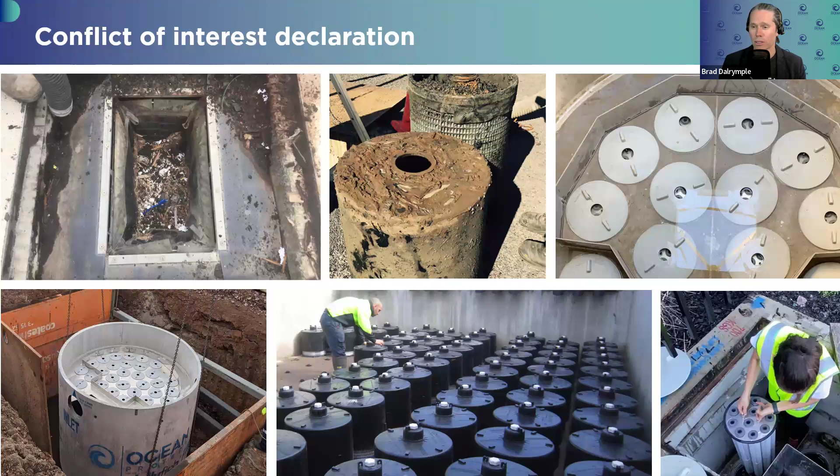But look, first up, before we dive into the content around proprietary stormwater treatment assets, full disclosure, we've got obviously a significant conflict of interest here. Ocean Protect, both Peter and I work for, we sell proprietary stormwater treatment assets, a whole range. And look, we're trying to mitigate those conflicts of interest as best we can. We'll try and provide full references to everything we say today. But obviously, happy to take questions from the field as well.

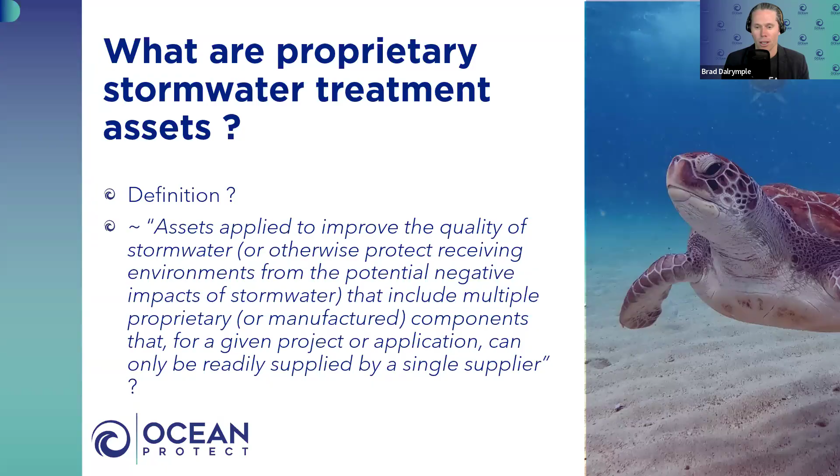Starting with the Ocean Guard, which is our gully pit insert gross pollutant trap. Basically it's mounted into the pit type system, sits below the grate. There's diverters, flow diverters at the top of the system that send the flow into the basket.

We typically have a 200 micron media bag inside the Ocean Guards. There's high flow bypass slots at the top as well for when the flow rate exceeds 20 liters a second, which is the treatment flow rate per Ocean Guard.

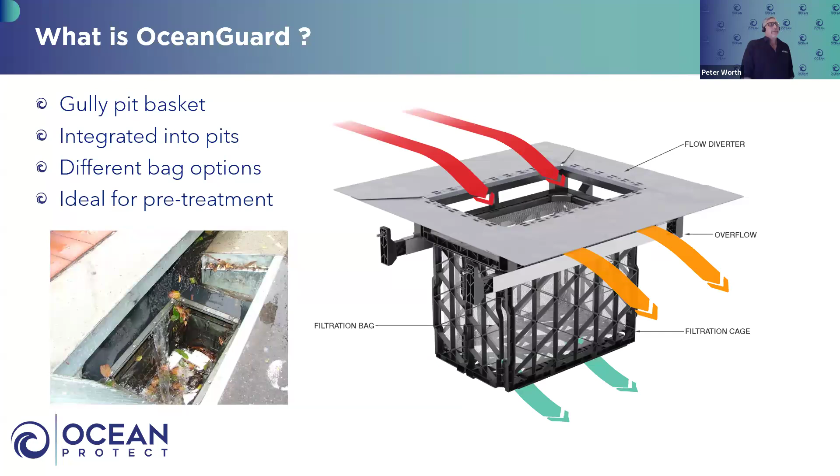We have different bags and different depths and different sizes that we can use to fit generally most standard size precast concrete or plastic pits that you have on your projects. The picture on screen is showing some Ocean Guards installed, capturing a lot of gross pollutants and some pretty manky stuff.

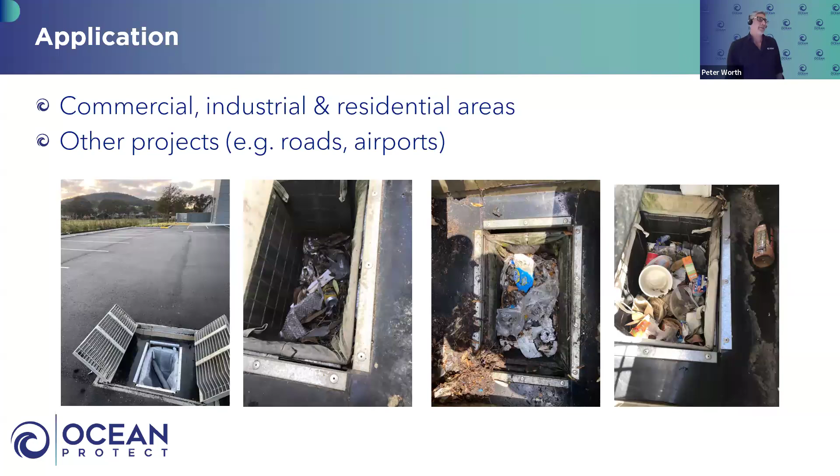So they do a great job of pre-treating before our other treatment assets that we're going to talk about as the slides go on. As I mentioned, they fit in generally pretty standard size pits from 450 by 450 up to 1200 by 1200. As you can see on screen, you can sit them below the grate.

You can have a piped inlet as well. Just keep in mind, if you are doing a piped inlet above an Ocean Guard in a pit, you don't want to set the Ocean Guard too deep.

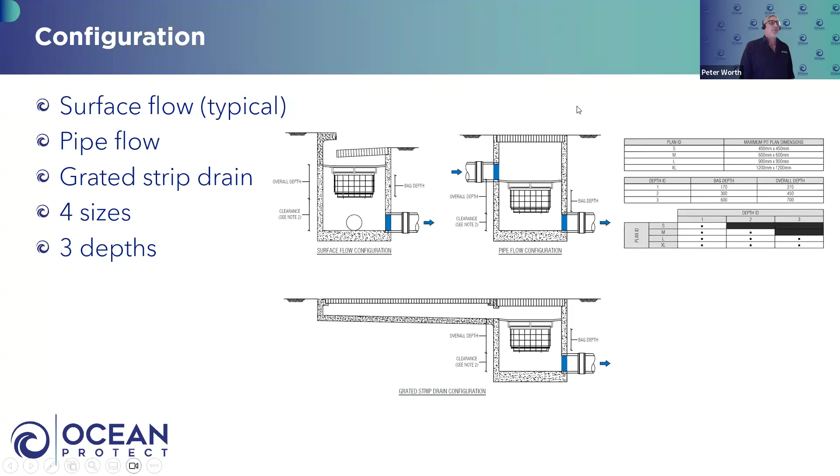The Ocean Guards have plenty of real world published studies and data on them, two peer-reviewed reports, and it's also SQIDEP verified, the Ocean Guard pit basket.

Maintenance is fairly simple. You need to lift the grate and remove the bag. There's a ring around the top of the bag, so you can remove it and empty out the contents, give it a quick backwash, and put it back in. We do have replacement bags available too if they're damaged. So just let us know if you've got a site with some damaged bags, we can always replace those. It's a fairly cost-effective way of fixing them up if there are issues with the bags.

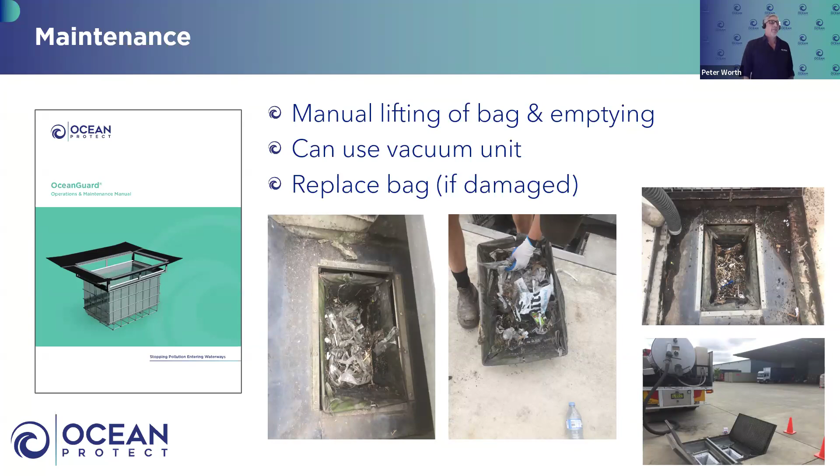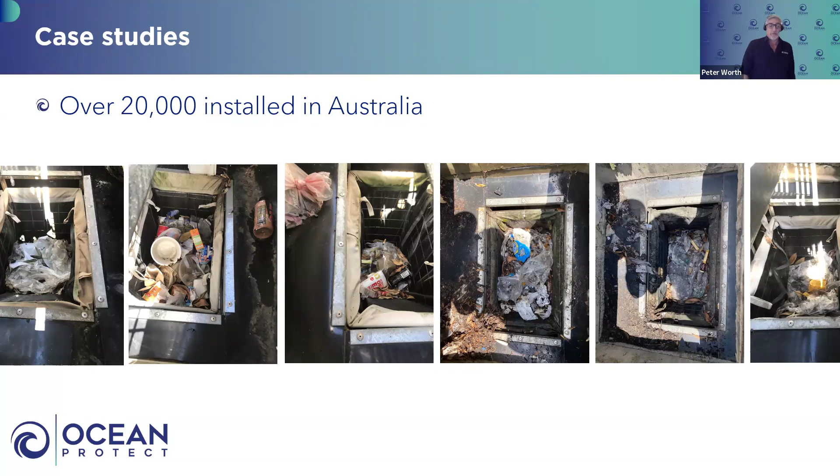We've installed over 20,000 throughout Australia to date, and we see them in a lot of jobs. We always pretty much use them for pre-treatment in front of our tertiary filtration devices, which I think we're going to talk about next.

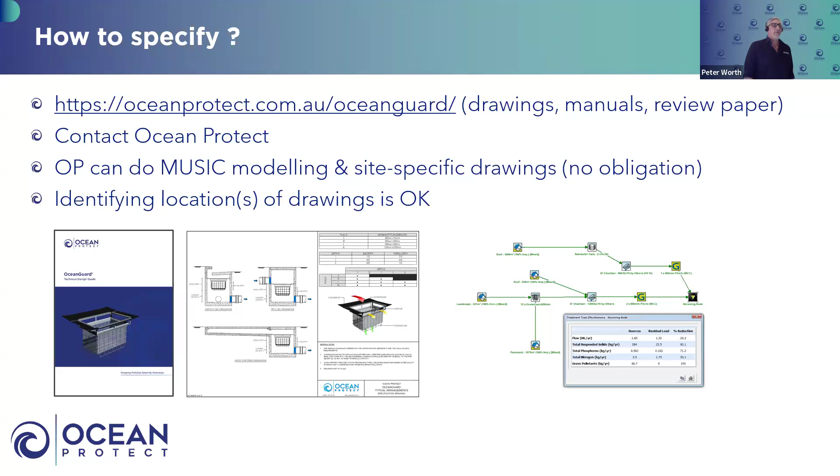We can dive straight into the storm filter now, Pete, if you like. Let's do it. The storm filter cartridge, we've sold in Australia for 25-plus years, numerous systems already installed, and looking at them every day.

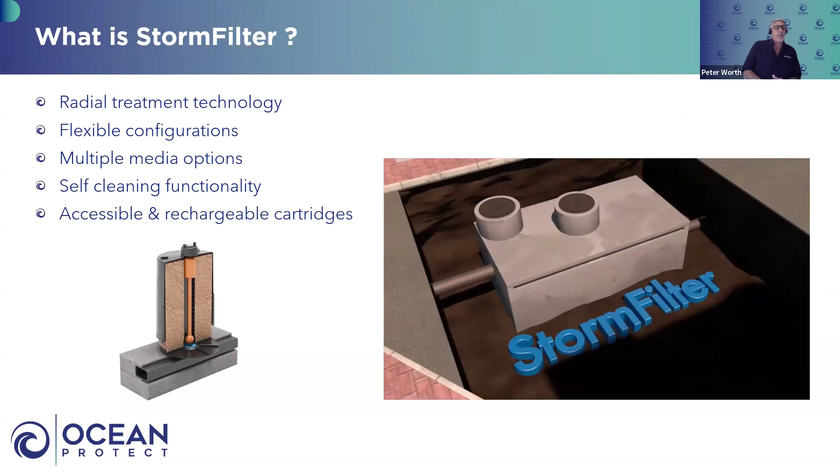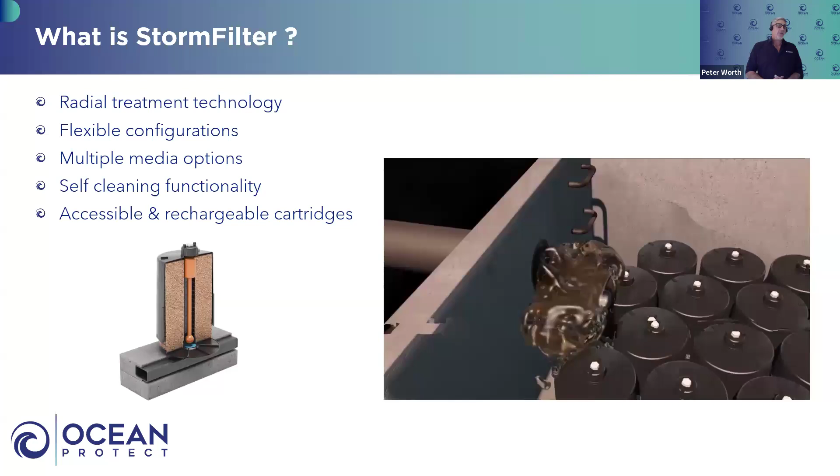It's a very flexible system, it's a media-filled cartridge. You can have multiple different configurations for the storm filter system. We can use them in a precast unit for treatment only, or if you do have a detention requirement on your site, we can also put them in a section of your larger detention tank, usually at the inlet, so we treat the first flushes and the early flows off your site.

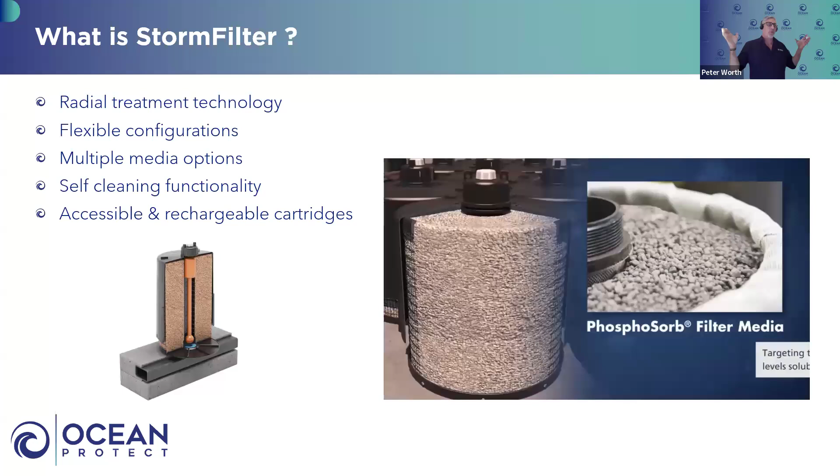Basically, it's a media-filled cartridge with a float inside, siphon actuated. As water builds up in the chamber, it lifts that float and draws the water radially around the full surface area of the storm filter cartridge, down through the center tube, and out through the underdrain pipework that we encase in a false floor within the chamber, as you can see in the video on screen.

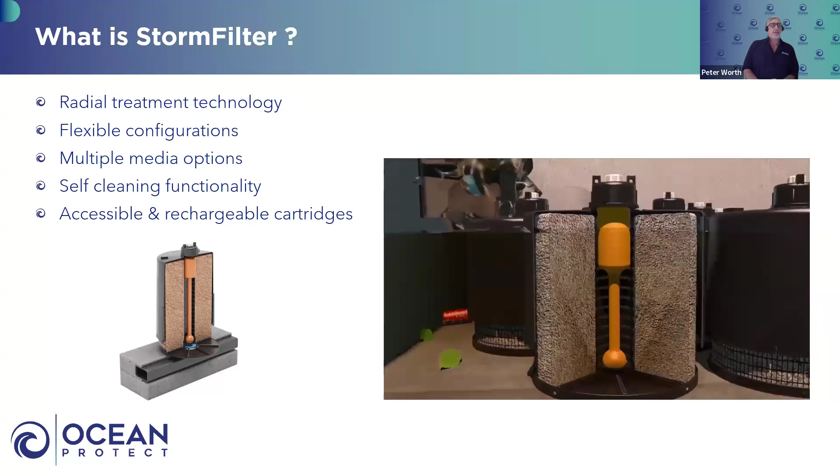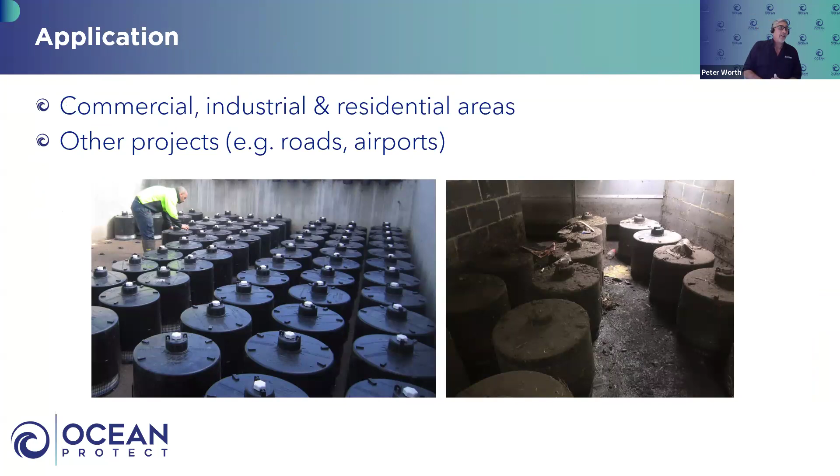Very efficient for removing your TSS, TP, and TN, and again, SQIDEP approved for the PhosphoSorb media. Commonly used in many commercial, industrial, and residential areas, and other projects like roads and airports. We've installed thousands of these throughout Australia to date.

We have 3 different hydraulic height cartridges available: the tall 690, the standard 460, and the short 310 cartridge. Just to note, however, the standard 460 and the short 310 cartridge are physically the same height. The float inside the cartridge is different, so it actuates that siphon and backwash and engages the treatment at a different head. So just keep that in mind if you are looking at a shallow tank.

Typically for the tall 690 cartridges, we'd request a minimum internal tank height of 1100 to 1200 mil. For the standard and the short cartridges, 800 mil is about as low as you want to go for those type of systems.

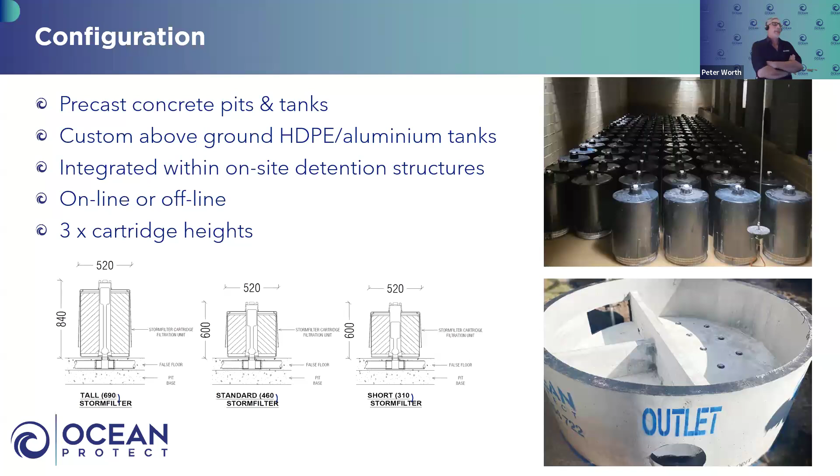As I mentioned before, the StormFilter PhosphoSorb media is SQIDEP verified and approved, so we can use that in any areas that you may need to fit that bill, or councils that have SQIDEP requirements. There's plenty of real world studies and peer reviews available. If you want the data, just let us know.

We do the maintenance of the storm filter systems a little bit like a swap and go with your gas bottles at the service station. So if we had a system with 10 storm filter cartridges, and we knew it was time to change those cartridges, typically anywhere between 1 to 3 years, we would come to site with refurbished cartridges with new media. We would take out the old cartridges, replace them with the new ones, and clean out the chamber at the same time. The other advantage to the storm filter cartridge, a bit different to some other products on the market, is that we can undo the cap at the top, lift the hood off, and remove the media via a suction hose, which allows you to pass the cartridges out empty. That can be a good thing to keep in mind if you've got shallow tanks and tricky sites.

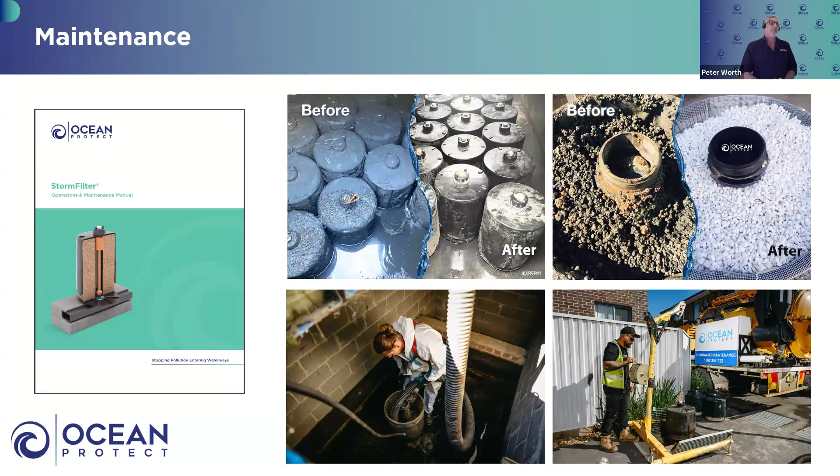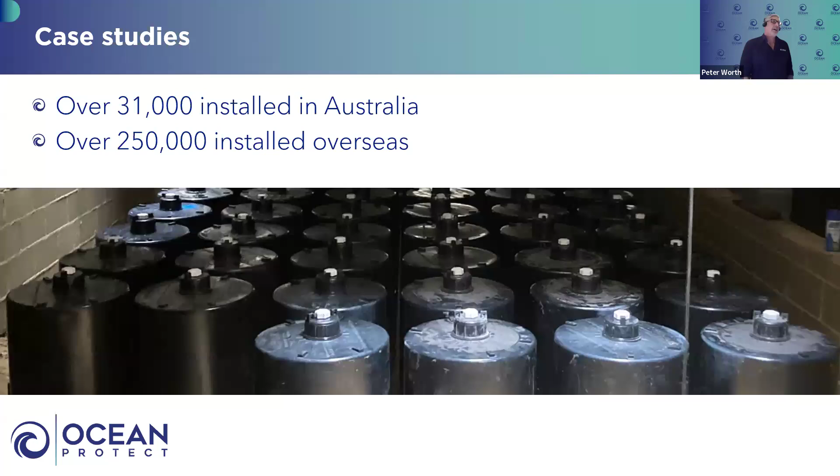To date, we've had over 31,000 installed throughout Australia, and over 250,000 installed overseas. In my opinion, it's the most used proprietary filtration product worldwide. Again, happy to look at your models and assist you in appropriately sizing your treatment trains, storm filters, and OceanGuard systems for your projects.

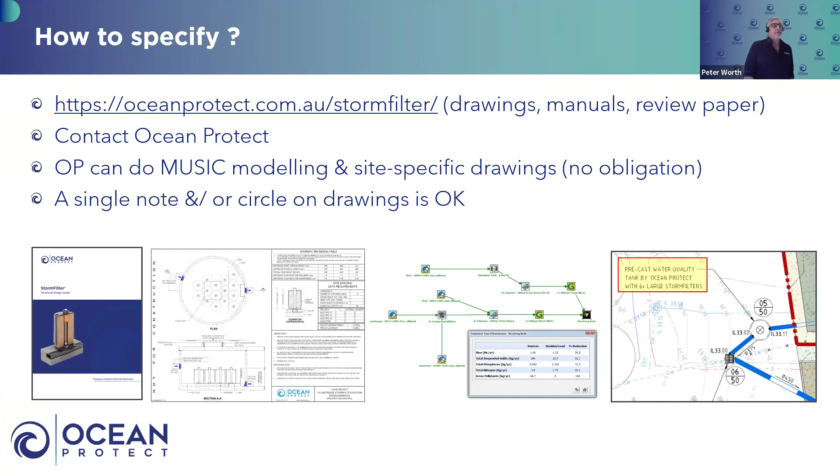Let's dive into the jellyfish, last but not least.

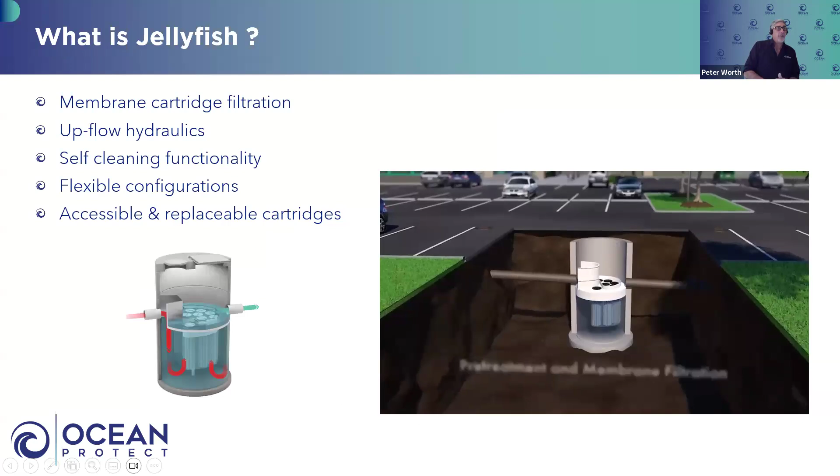The jellyfish is a little bit different to the storm filter cartridge, where we build water inside the chamber to actuate the siphons in the storm filter cartridges. It operates a little differently. You've got an inlet pipe, noting that all jellyfish systems need to be offline. Water comes in and hits the maintenance access wall. It's not a weir, that's for ongoing maintenance.

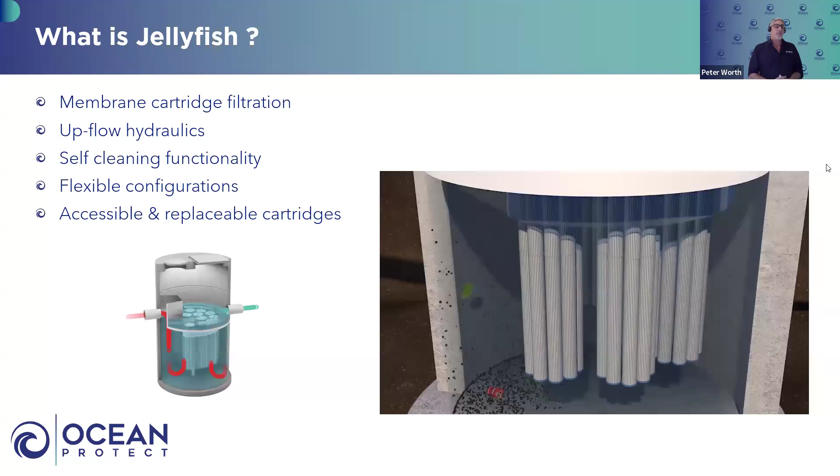It forces water down into the sump. Water then has to change direction and float up, which promotes sediment dropping to the ground, and goes from the outside through the tentacles and up through a hollow center tube inside each of those tentacles in the jellyfish cartridges. We also have a plastic separation skirt around the full depth of the jellyfish cartridges to help stop oily stuff, which you might get on car parks and similar sites, from adhering to the membrane of the jellyfish cartridges. Water then flows up through the top and out through the outlet pipe. Typically, you need 460 mil upstream driving head for a jellyfish system.

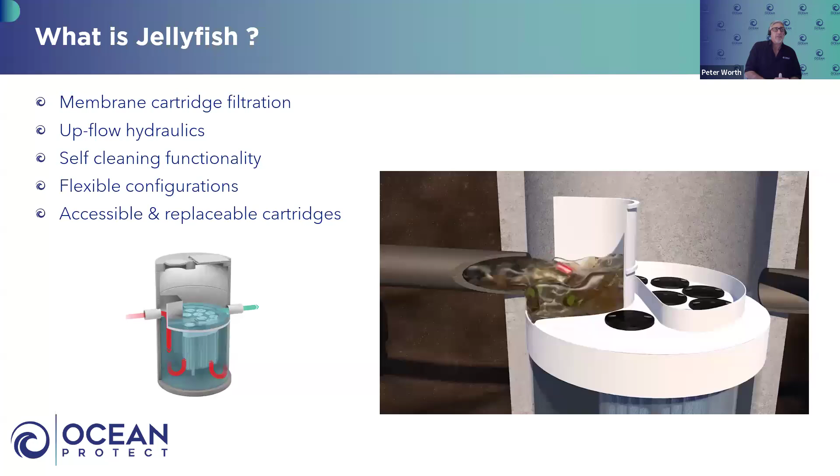Again, very suitable for commercial, industrial, and residential projects. It's very popular for sites that require a low driving head for one reason or another, or if you've got hydraulic issues. We've installed many jellyfish systems across Australia to date.

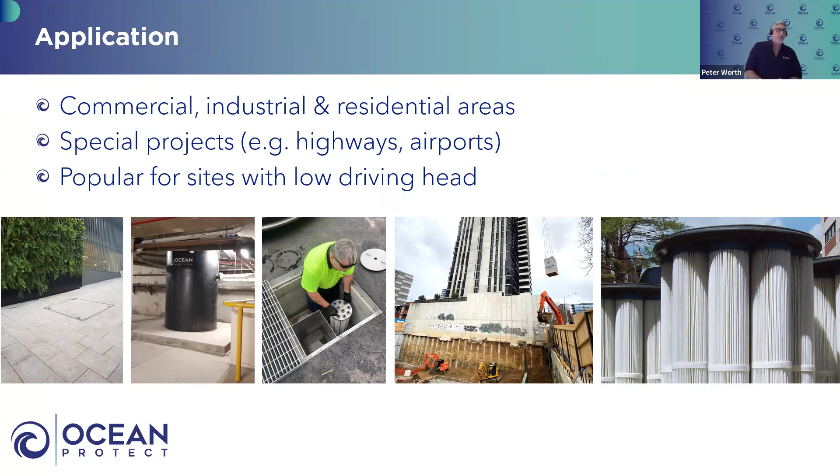Offline configuration, as I mentioned, can be done a couple of ways. You can have a weir and an upstream pit that sends the low flows to the jellyfish system off your main trunk line. If you don't want to use a weir, you can lift the bypass pipe to create a hydraulic weir. Again, the typical driving head for a jellyfish system is 460 mils, meaning the high flow bypass pipe would be 460 mil higher than the outlet of that offline jellyfish system. Typically, there's 150 mil between your inlet and outlet pipes of the offline jellyfish.

Two real-world published studies, two peer review reports, and again SQIDEP verified and approved by Stormwater Australia, so able to be used in any sites you might need to, or LGAs that require that SQIDEP approval.

We talk about SQIDEP approval, but it's probably worth noting that it's only required in a few councils in southeast Queensland currently, and I think Western Sydney. Outside of those areas, including those areas, OceanGuard, Stormfilter and Jellyfish are pretty much approved in the vast majority of councils, at least for private sites. But if you're ever in doubt, obviously you can just contact us and let us know.

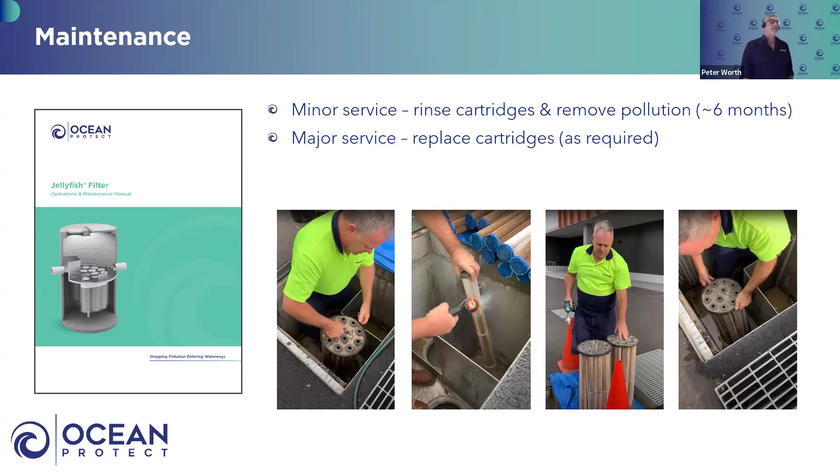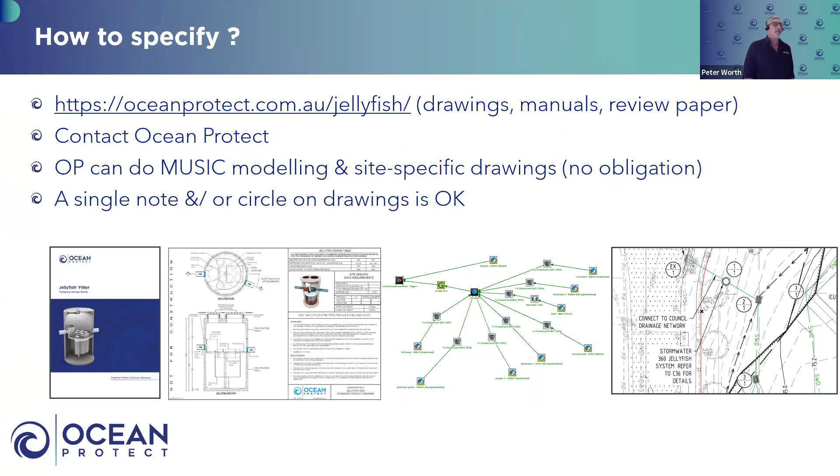Ocean Protect offers maintenance of all our systems. Over 1,600 jellyfish systems installed throughout Australia since 2017. Again, happy to assist engineers or councils or whoever in appropriately sizing our jellyfish systems, and all our systems for that matter. That's jellyfish.

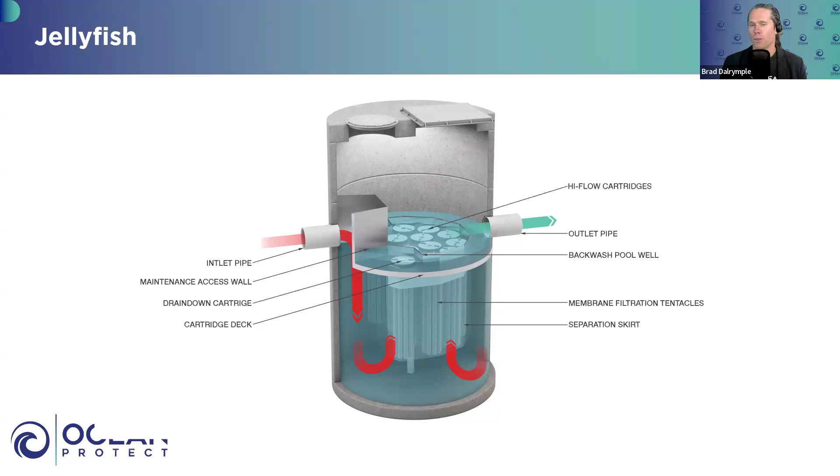Thank you, Peter. If you've got any specific questions about those specific assets, feel free to put them in the Q&A. But I'm going to dive into something a little bit more controversial, and talk about some of the common claims I've seen in our industry for several years around proprietary assets. These are generally the main ones I see. It's obviously relevant for Ocean Protect assets, but it might be relevant for other manufacturers as well. To avoid any dramas with other companies, I'm going to predominantly focus on Ocean Protect assets as the example when talking about these claims.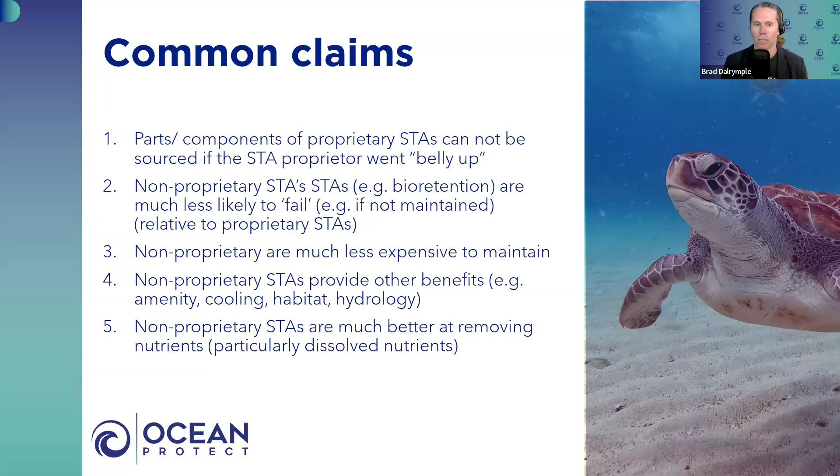Claim number one is that if Ocean Protect went belly up, we won't be able to get any of the parts or components, so the assets themselves would be useless. So Stormfilter, for example, yeah, the media's used up, absorbed all the pollution, Ocean Protect for some reason went belly up, can't get replacement media, so the Stormfilter cartridge is useless. Is that right? Yeah, I've heard this commonly.

Look, I think a couple of points on this. Number one, Ocean Protect is at extremely low risk of going belly up or bankrupt or otherwise into liquidation, or closing up shop. We've been operating for over 21 years in Australia now, and, without sharing our bank details, we're in a very financially sound position. So extremely low risk of going belly up.

But for whatever reason, if we did, Contech, which is our partner company in the US, is a very financially sound company. I think they've got over 1,600 employees or thereabouts, and have been operating for longer than Ocean Protect. So if Ocean Protect weren't around, anyone could easily get the components or parts from Contech directly. But having said that, if Ocean Protect wasn't around, I'm sure, given the nature of our business, someone would probably take our spot quite quickly, recognizing that it's a financially sound company, and it's doing a great job protecting the environment and making a dollar at the same time.

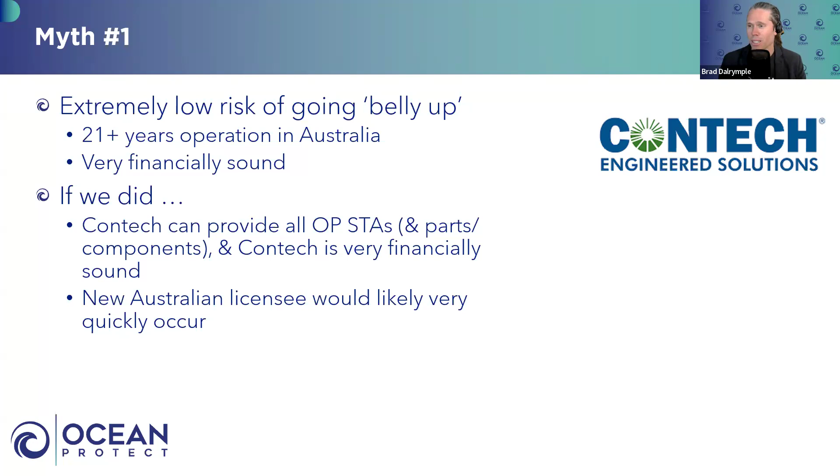So it's a pretty cool business, I think. I think if Ocean Protect went under, someone would take our spot, albeit not as cool, but they'd probably give it a crack. Am I wrong, Peter? No, you're right. So look, this claim is totally busted. I just don't see this as accurate in any way, shape, or form.

Number two: the claim that non-proprietary assets like bioretention or wetlands are much less likely to fail, i.e. not going to work, if they're not maintained, relative to proprietary assets. So the general comment I get is, oh, I can leave bioretention alone for years, decades, and it'll still work, no worries at all. Whereas Ocean Protect assets or others, yeah, if I don't maintain them, they won't work.

Okay, look, let's have a look at the data around this. I'm going to show a couple of studies. First up, this is a study, full disclosure, I was co-author on this study, but we basically collected condition assessment data for bioretention systems. One set of data from Moreton Bay Regional Council, I think by memory there's about 318 bioretention systems, and another council in Southeast Queensland, which I can't name, who owned a whole bunch of bioretention systems.

And long story short, about 20% were in a poor or very poor condition, which basically means they need to be rectified, i.e. major rectification works like replacing the system. And recognizing I'm quoting myself and my co-authors there, straight out of the paper published at the Ozwater Conference: a lack of maintenance activities is predicted to be the key reason for the poor or very poor condition assessment ratings.

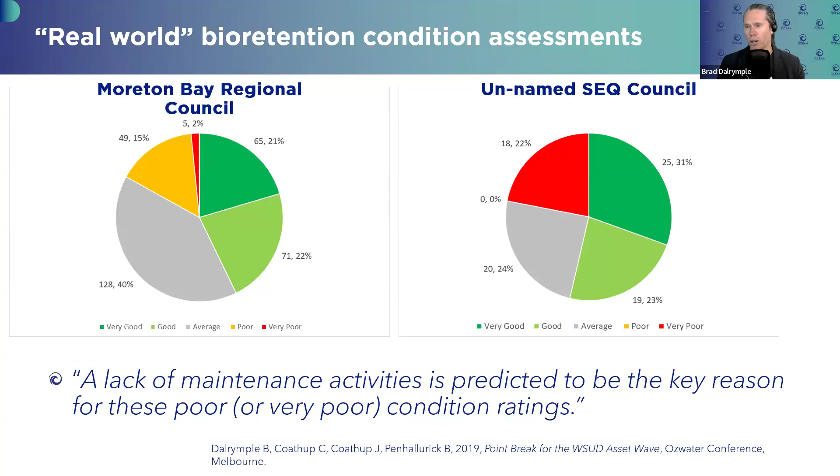So that's just bioretention, recognizing it's just one study. Another study, if I can refer to, is by Andrew Thomas, who's now president of Stormwater New South Wales. And I think I can see Murray Powell's name there—he's vice president of Stormwater New South Wales—and Tim Fletcher and a couple others.

They looked at condition assessment ratings for a bunch of assets, bioretention systems, wetlands, etc., and obviously found a very significant proportion were in poor condition. Quoting this paper: maintenance practices, or the lack thereof, is the leading reason for the high proportion of assets being in poor condition. They say appropriate levels of maintenance may be the single most important issue currently facing their effective performance. So this idea that you can leave non-proprietary assets without any maintenance—I just don't think the data is there to support it.

I was talking to a consultant yesterday, I won't mention their name, who thought the failure rates were probably closer to about 80% for bioretention systems. But whether it's 80 or 20 or somewhere in between, fundamentally these assets—bioretention, wetlands, etc.—need to be maintained, just like all assets, including proprietary ones.

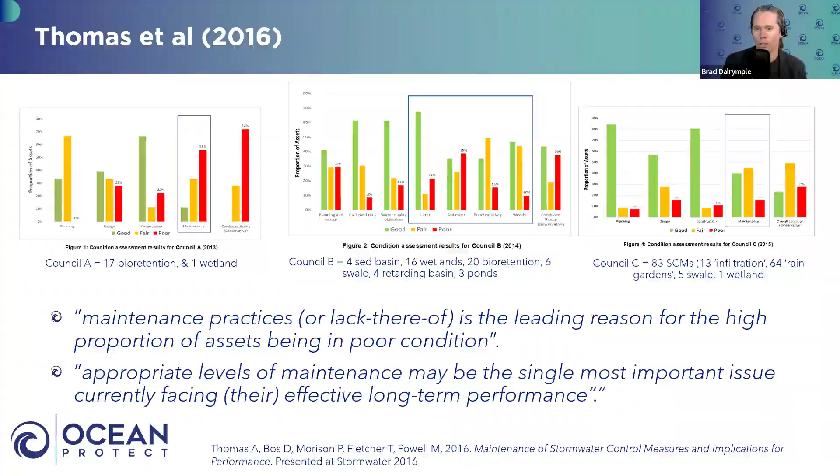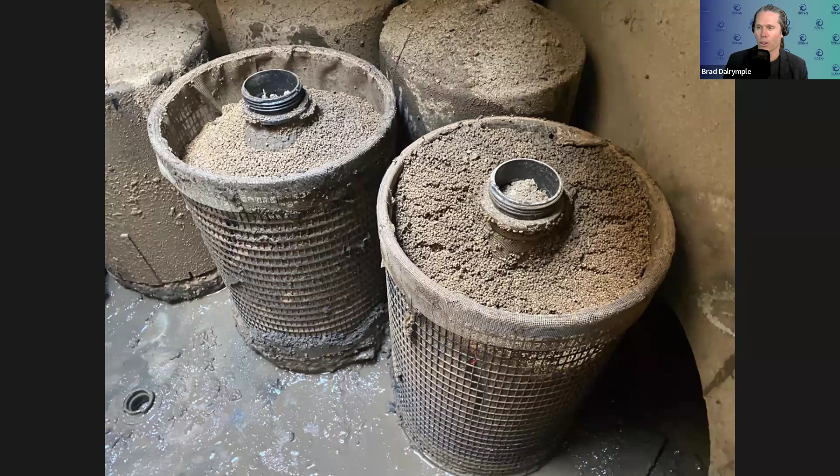We know that this media needs to be replaced after a certain period of time, and that's actually reasonably easily done, as Peter referred to. We see what our assets do, and this sort of pollution will also accumulate in other filters, whether it's a vegetated system or a wetland or whatever. I'd really question the ability of a bioretention system to just sit there receiving stormwater flow, intercepting this pollution, without needing this material to be routinely, albeit infrequently, cleaned out. It's not going to go anywhere, that's for sure.

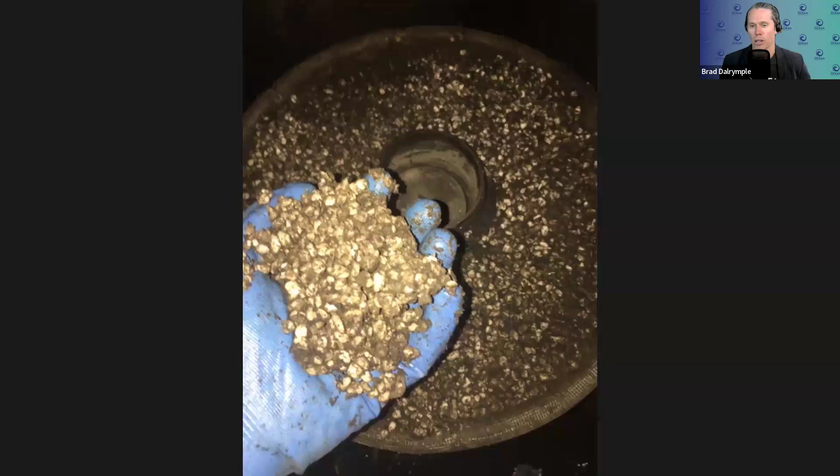Give you an example—this is a storm filter at a shopping centre car park in Adelaide. Pretty disgusting. Again, if bioretention is a filter, it needs to be maintained essentially.

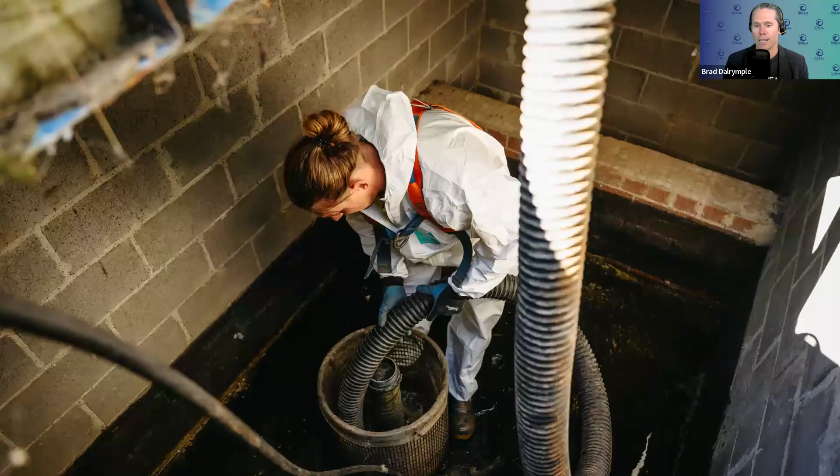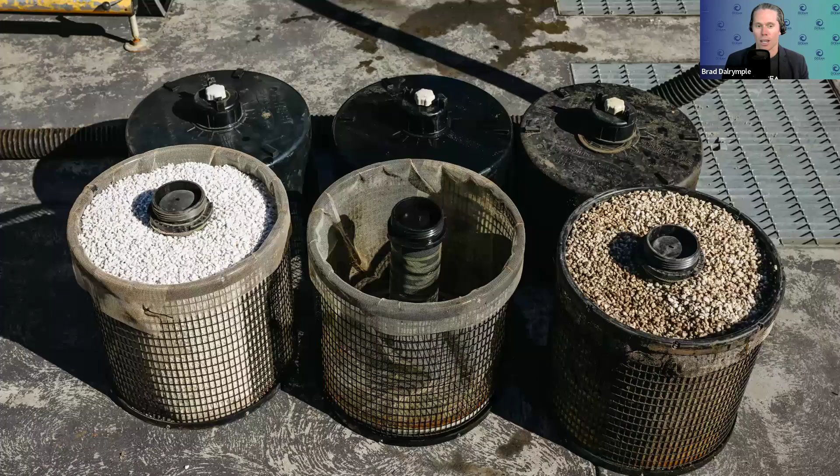This is just our crew doing some maintenance—replacing and sucking out the filter media—and as Peter referred to before, we can just replace old filters with new filters quite easily. That's another photo of new filters on the left, old filters on the right, very easily replaced.

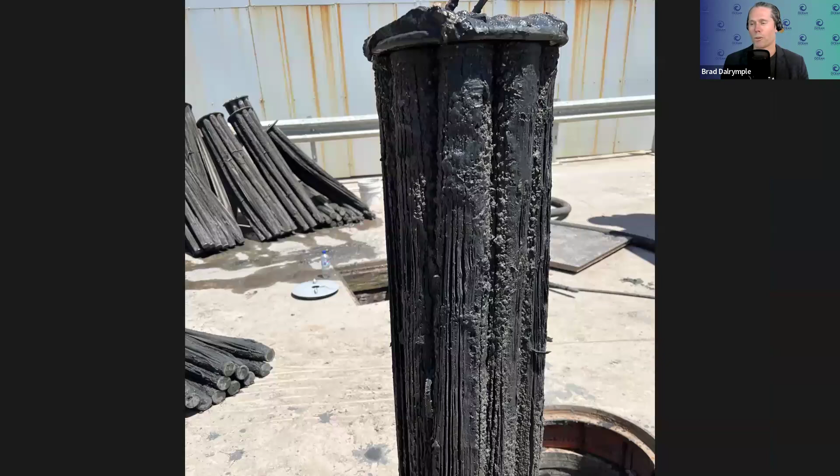This is Jellyfish, Peter referred to before. These are new cartridges, but you can see these are old cartridges that have been in the ground for a few years—you can kind of see what they collect. Again, all stormwater treatment assets need to be maintained. I don't think it's appropriate to say non-proprietary assets don't need maintenance, or even that they need less maintenance than a proprietary asset.

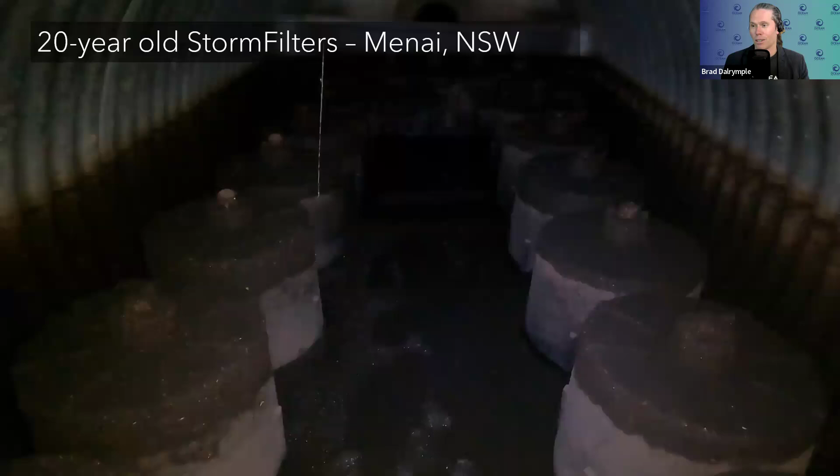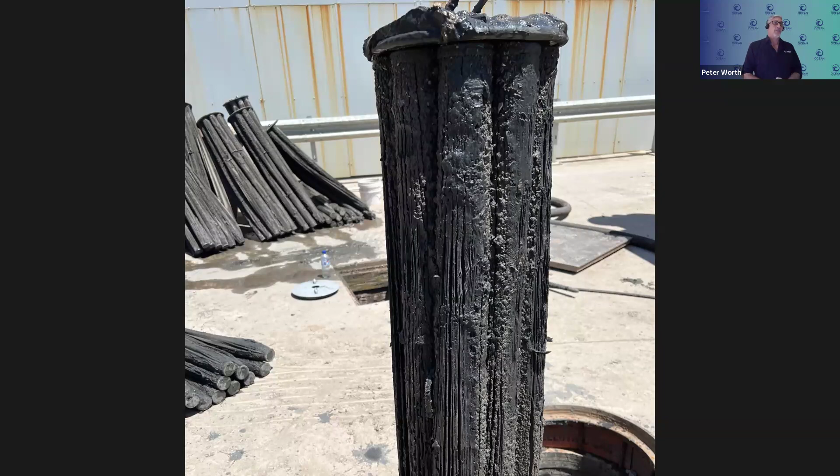One thing to mention too, Brad, sorry to interrupt—it's always paramount that we don't have our proprietary systems, I'll just speak about those, online before construction is finished on site. These systems are designed via MUSIC models and stormwater management plans for the end use of the project, so we don't want them used as construction-load-type treatment systems.

Cool, thanks Peter. I'm not sure if you guys can see this, it doesn't appear very well—it's hard to take photos underground, but this is a storm filter, sorry, this chamber with a whole bunch of storm filter cartridges underground. Our esteemed director Michael Wicks checked this out 20 years after they were installed, and we don't believe they've ever been maintained. Fundamentally, it's really easy to get this back up to speed.

So it had a whole bunch of accumulated pollution—the cartridges had probably hit their limit in terms of accumulation of pollution—but yeah, pretty easy to fix up. Just suck out the sludge at the bottom and replace the carts, as we've already referred to.

So one thing I'd say is with at least the storm filter, it's very easy to bring it back online even if it hasn't been maintained for a very, very long time. Even where I've seen an oil tanker just dump a whole bunch of oil in it, it's a reasonably easy thing to rectify and get back up to speed.

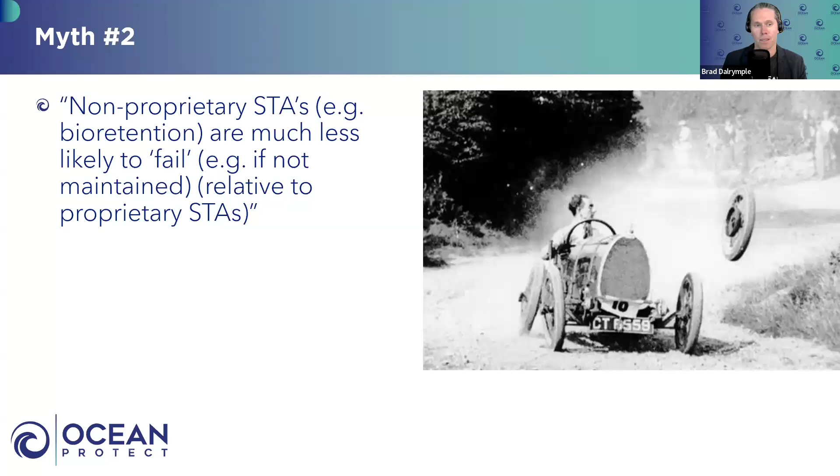Certainly relative to a bioretention system or a wetland. So this claim that non-proprietary assets are less likely to fail—I just don't see the evidence to support that at all. Happy to be disagreed with, and I know I've got a conflict of interest, but I'm happy to look at anyone's data that can show or somehow indicate otherwise.

Claim number 3: non-proprietary assets are cheaper to maintain.

Apparently, Peter, I'm not sure about you, apparently I'm high maintenance, as are proprietary assets. Please, come on. No, I'm kidding.

To talk to this point, we actually did a study a couple of years ago. This is publicly available in that review paper you can see on the left there. We looked at a typical residential development in Brisbane designed to achieve the state planning policy targets required by council, and we looked at how much it would cost - whether it's a conventional bioretention, a wetland, an Ocean Protect Filterra bioretention system, a storm filter, or a jellyfish combination - what's going to be the cheapest, both in terms of construction or acquisition costs and maintenance costs.

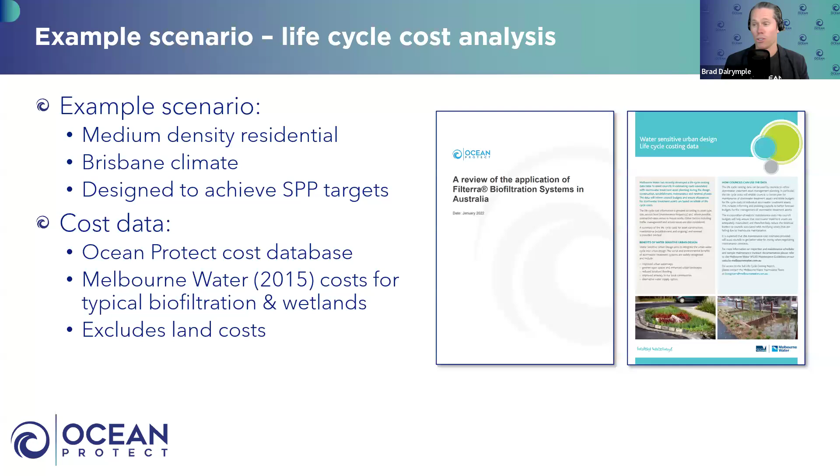We've got a very good understanding of how much our assets cost to install and maintain, because we quote on it every day, literally. For the cost data, we used Melbourne Water information, which I'm not sure how accurate it is, but it's probably the best industry available information I could get my hands on at the time. It's worth noting that we excluded any benefits associated with land cost savings - obviously proprietary assets, when underground, can save a lot of money by not using land, but we've completely excluded that from the analysis.

Just to show you the results - again, it's all publicly available in that report I showed - this is the acquisition costs for those various scenarios. So you can see here a scenario of jellyfish with Ocean Guard, storm filter with Ocean Guard, etc., relative to typical bioretention, whether it's an on-street rain garden, tree pit, bioretention system, or conventional wetland. Again, these are all sized to achieve the pollutant load removal targets as per state planning policy for that Brisbane residential development, with both high cost estimates and typical cost estimates.

So generally, in this case, wetlands are pretty expensive. typical bioretention tree pits would be the most expensive to install. The Filterra bioretention is typically cheapest for this scenario. This is consistent with what we see day in, day out.

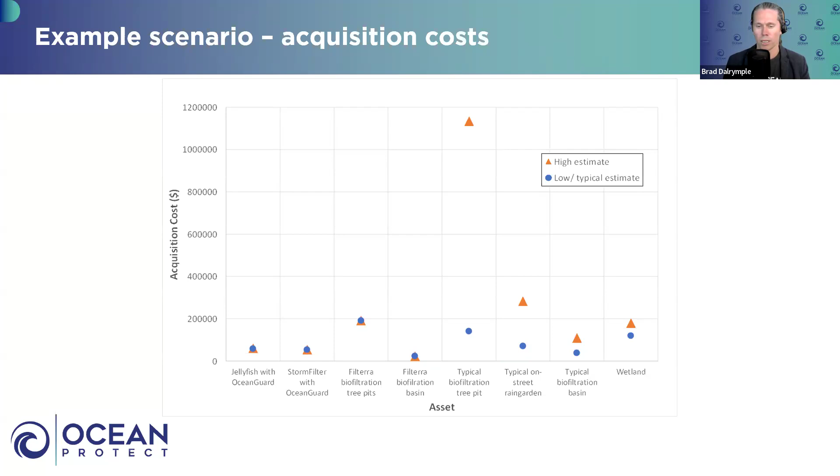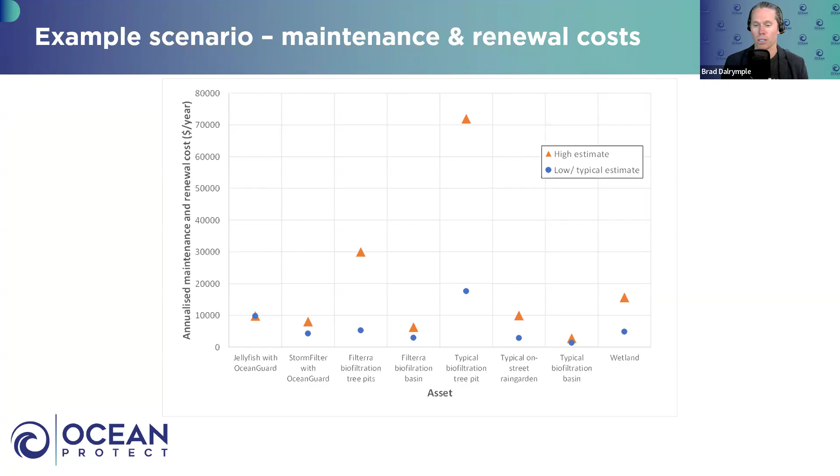But in terms of maintenance costs, a typical bioretention system is probably the cheapest if you believe the Melbourne Water costs, which we will for the time being. But certainly the proprietary assets are not significantly more expensive. The wetland option is actually more expensive than some of the proprietary solutions. So that indicates to me that not always is proprietary going to be more expensive to maintain - in fact, sometimes it can be cheaper. Certainly the conventional bioretention tree pit solution in this case would be the most expensive.

But that study aside, back in 2022, a couple of years ago, we looked at how much it costs to maintain our own assets on the Gold Coast. At the time we had 12 facility management plans and 48 maintenance contracts. FMPs, for those who aren't familiar, basically provide - Ocean Protect looks after the stormwater treatment assets, providing full warranty and insurance for the life of the contract, which can be a year or so, up to 15 years I think on the Gold Coast.

25 years is typically the longest we do - I'm not sure. Yeah, we've seen 25 years in Western Sydney. I'm not sure about the Gold Coast, but certainly long-term contracts often, and this cost is a fixed sum, so we've got to be confident that it's reasonable.

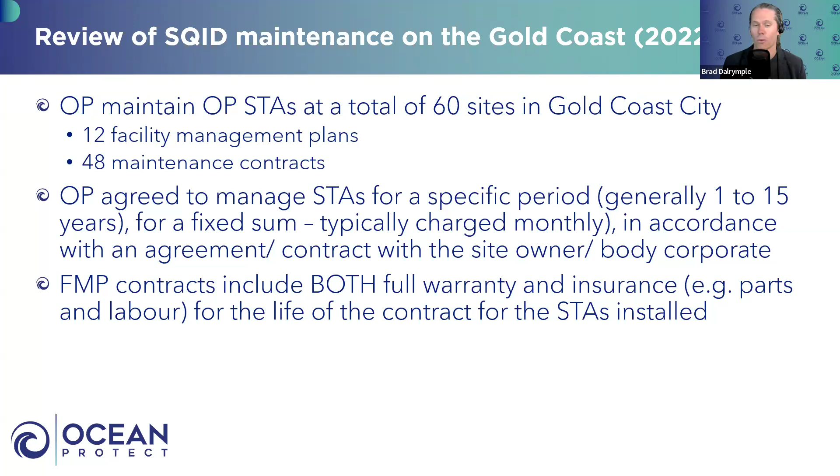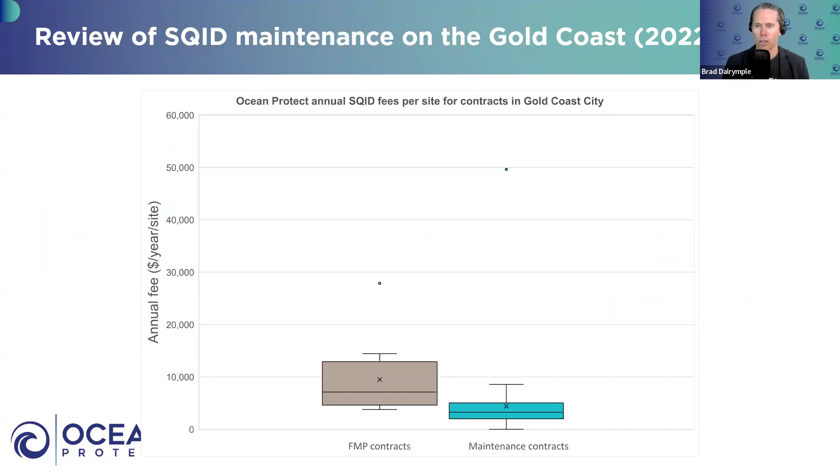But just to show you what the study results showed: this is the annual fee per year per site for all our contracts, for FMP contracts and maintenance contracts across the Gold Coast. But if you want to break that down into a cost per dwelling, that's what this box plot shows - essentially the spread of data. Long story short, if you look at just the residential sites for the FMPs, to look after essentially all your stormwater pollution problems...

Ocean Protect are charging roughly an average of $2.65 per dwelling per week for FMPs, and for the maintenance contracts, it's about $5.43 per dwelling per week. Long story short, for an FMP it's about the cost of half a cup of coffee per week per dwelling. For a maintenance contract, it's about a cup of coffee per dwelling per week to perform a really fundamental job of protecting the downstream waterways, in this case on the Gold Coast. I wouldn't have thought that would be overly expensive.

I haven't done that comparison for bioretention system maintenance contracts because that information is often not readily available. But I don't think that's super expensive. I'm happy to be disagreed with, or if someone has other evidence to indicate this is somehow expensive, or that bioretention or wetlands are way cheaper.

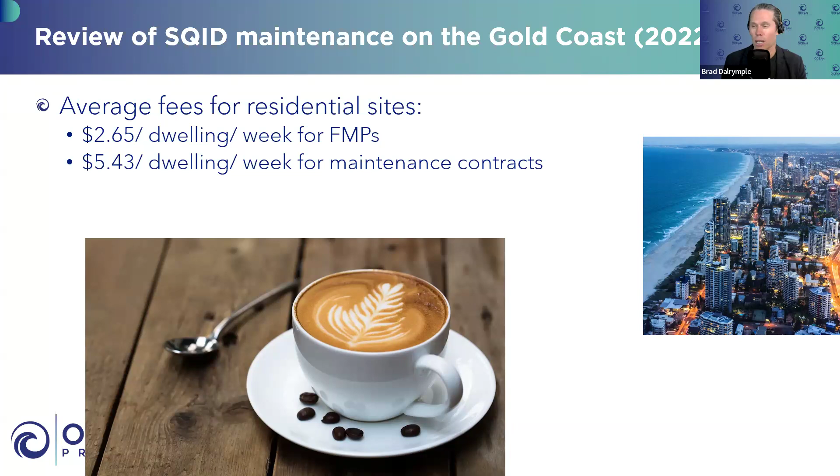It's also worthwhile noting on maintenance that the cost information we use is if Ocean Protect does the maintenance. As we've indicated, our assets can be maintained by others. Obviously you still need to get parts and components from Ocean Protect within Australia, but other maintenance activities, whether it's cleaning out a gully basket or sucking out a tank, can certainly be done by others.

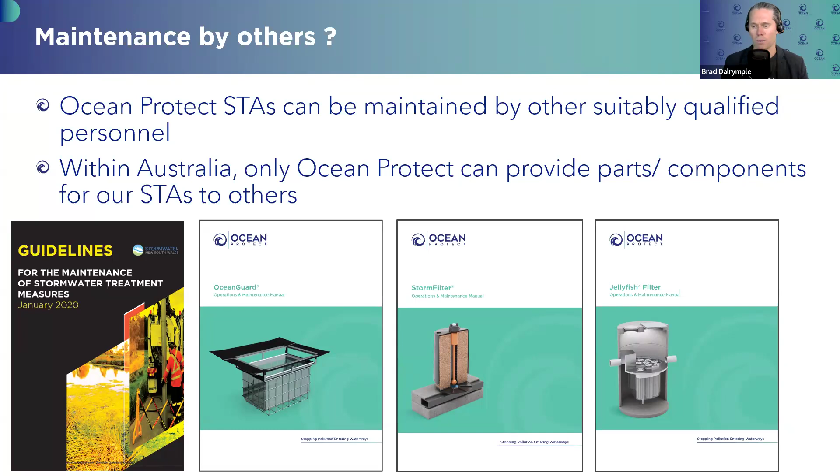And all the guidance around how to do that is readily available, whether it's the Stormwater New South Wales guidelines put out a few years ago, led by the legendary Murray Powell from Optimal Stormwater, or one of our publicly available maintenance guidelines. Maintenance can certainly be done by others.

So the claim that non-proprietary assets are less expensive, look, it is plausible. But I don't think it's fact that non-proprietary assets are always cheaper as a general rule. It's horses for courses, very site specific. And if in doubt, feel free to reach out to us and get a quotation and compare it to other devices.

Happy to provide the info for site specific jobs. Just let us know.

As I've indicated before, all assets need maintenance, and the preferred solutions and associated costs are very site specific. All our decisions around what's the best solution for a particular site should be informed by appropriate life cycle cost analyses, not just a blanket rule that proprietary assets are more expensive, which I don't believe is true at all.

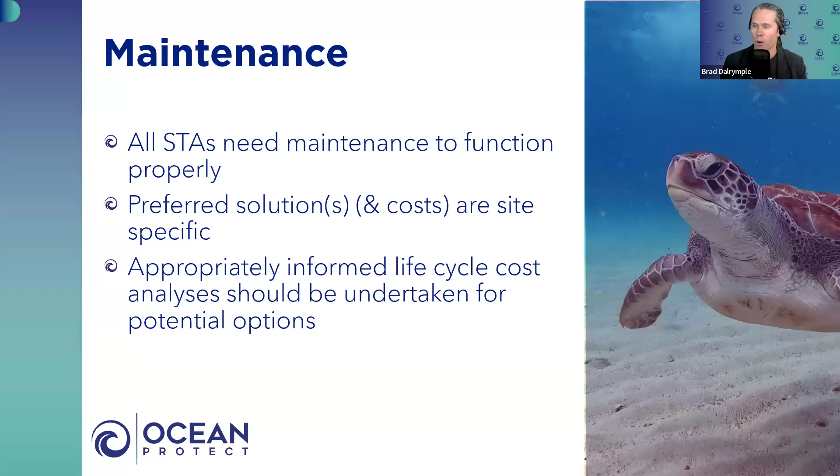Claim number four: non-proprietary assets provide other benefits that proprietary assets just don't, whether it's amenity, cooling, habitat, hydrology. Let's look at that.

I spent 15 years or so putting in non-proprietary assets, wetlands. Before you saw the light. These aren't all mine, but some of them certainly are.

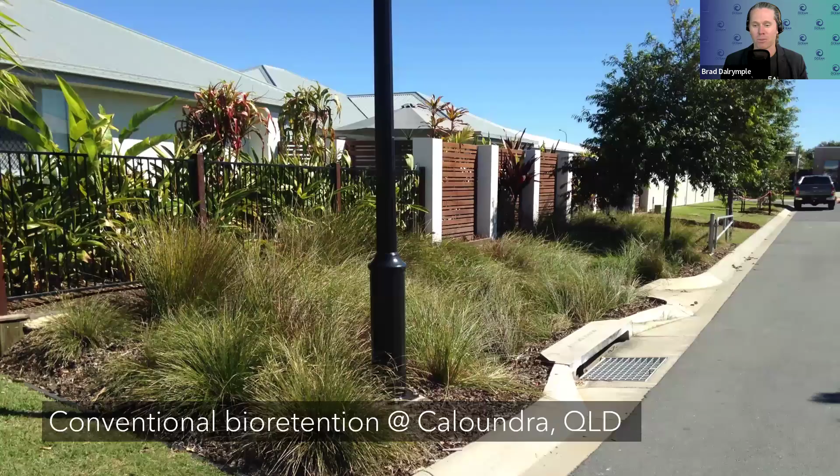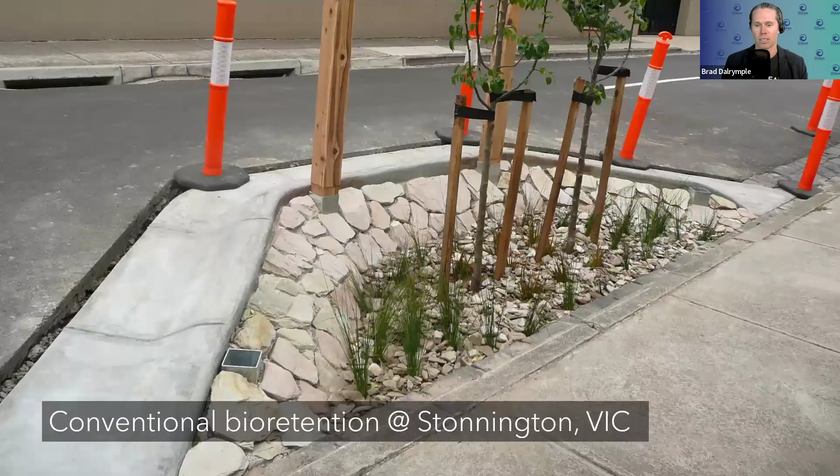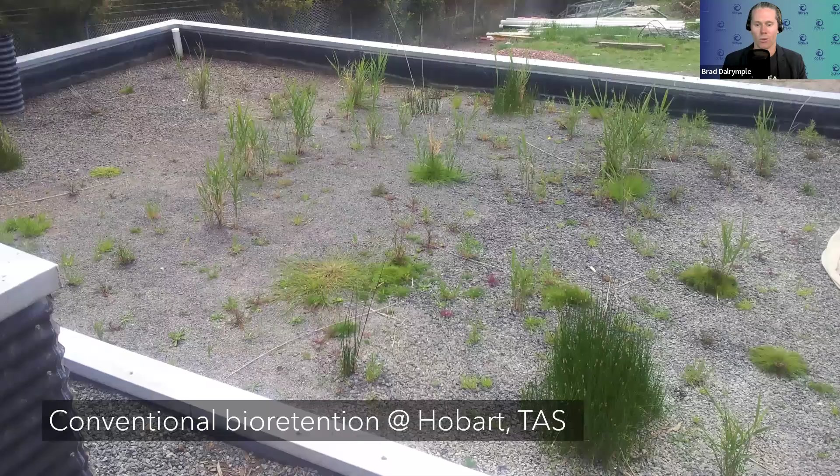But obviously we've all seen photos where the bioretention or wetland is certainly doing nothing to improve site amenity, to be nice about it. Whether it's a bioretention system that looks bloody awful in Hobart, got a dirty great big fence around it, it's deep, it's ugly, etc. I've got lots of photos of this.

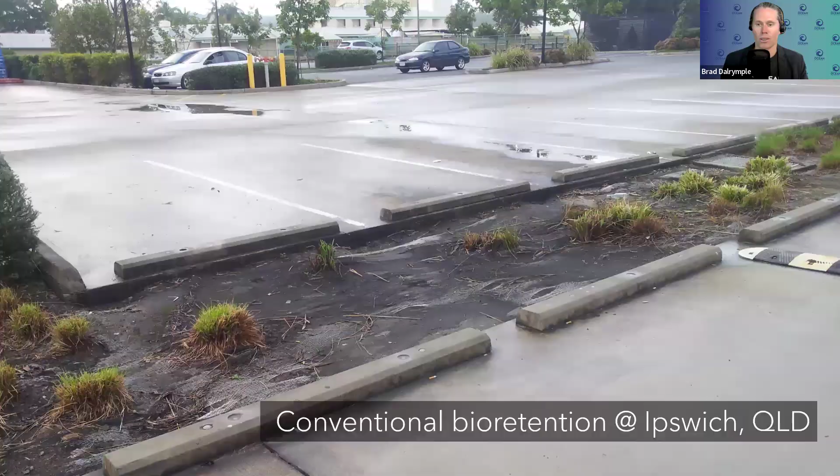I'll charge through them. There's a bioretention system in the car park in Ipswich, not looking too crash hot. There's lots of these at a certain location in Brisbane, without mentioning names.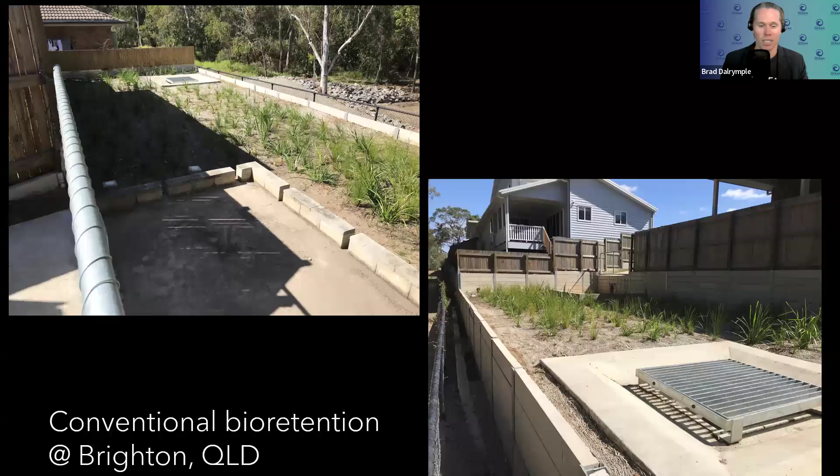But yeah, this is supposed to be a bioretention system, so certainly not adding much in the way of amenity. As per these ones, retaining walls everywhere, it looks ugly, terrible solution. And we see this time and time again, without mentioning any names, like Bunnings or McDonald's.

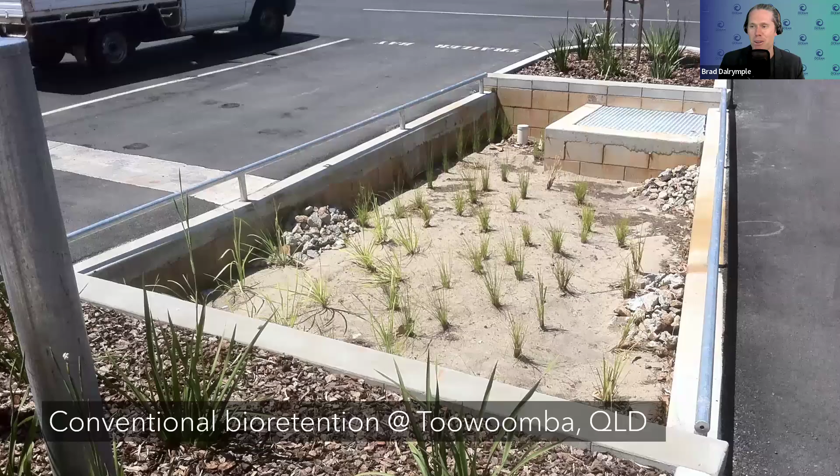Anyway, moving on, you've got public safety hazards too. Like this one in Toowoomba, they've got a railing there to protect your shopping trolley from going in, but it's at a perfect height to trip. And by the time your head has reached terminal velocity, it's probably going to meet with the concrete edge. We joke about this sort of stuff, but it's a real risk.

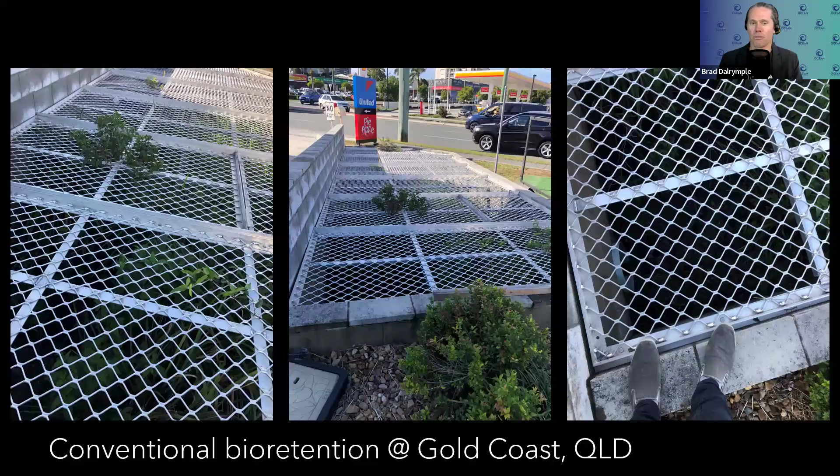I fundamentally think a lot of the time we should be going underground because of site constraints. Having said that, sometimes people put bioretention systems underground, as per this one on the Gold Coast. This is a bioretention system that is basically underground, with a grate over the top, I guess, to let a bit of sunlight in. If someone can convince me this is water sensitive urban design, I would love to hear from you.

But if you've got a council that has a blanket rule that non-proprietary assets have to be put in time and time again - Peter and I see this every day - this is often the result. I think it's just not always the best solution for every job.

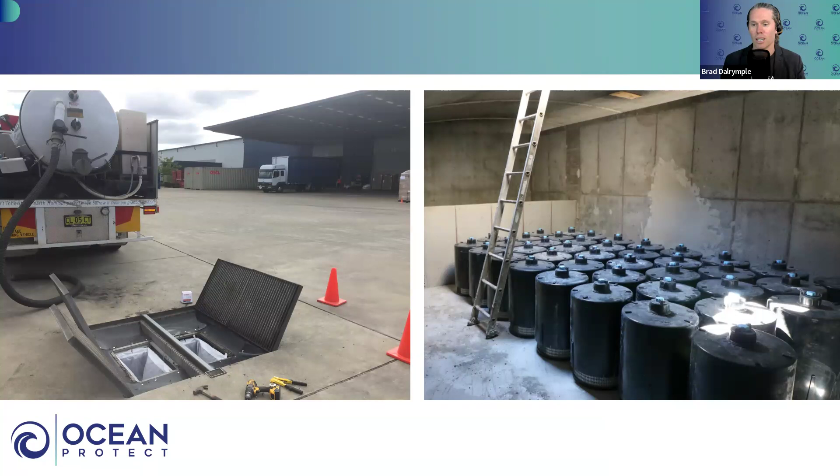Exactly. Sometimes it's a lot easier just to go underground where your site is constrained, where you can install the assets and maintain them appropriately. This is a before and after photo - you don't always have to have a car park or a road above it. It could be used for landscaping, etc. And then you can easily access it to maintain it and clean the pollution out without any public safety dramas.

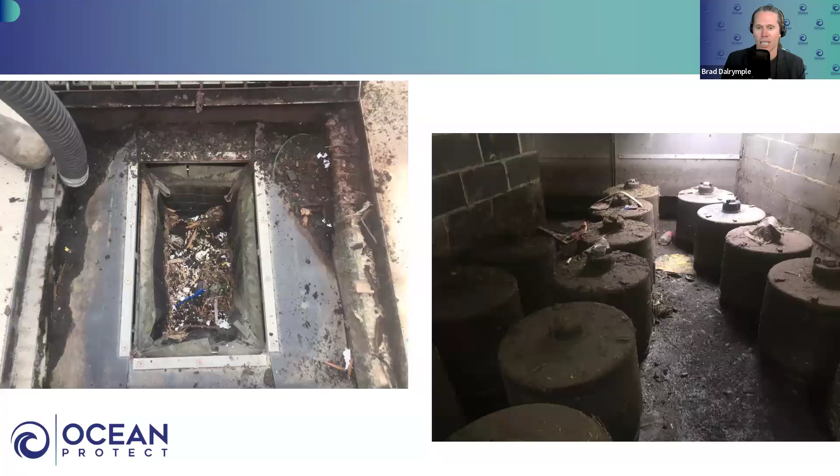So on this claim - look, I'd be the first to admit sometimes bioretention and particularly wetlands can add a lot of site amenity, cooling, and habitat values, but not always. So again, we should be developing a solution specifically optimized for the site constraints.

Would be a fair comment. This is the last one I'm going to cover: non-proprietary assets are just better at removing nutrients, particularly dissolved nutrients. Without mentioning names like Mid Coast Council, this is their rule - this is the reason why they don't allow proprietary assets. Sorry folks at Mid Coast Council and others, the data just doesn't prove that at all. In fact, the opposite is probably true.

Long story short, conventional bioretention performance is highly variable. Sometimes it can do a good job at removing pollution, particularly TSS, but often we see nutrient concentrations increasing across the asset.

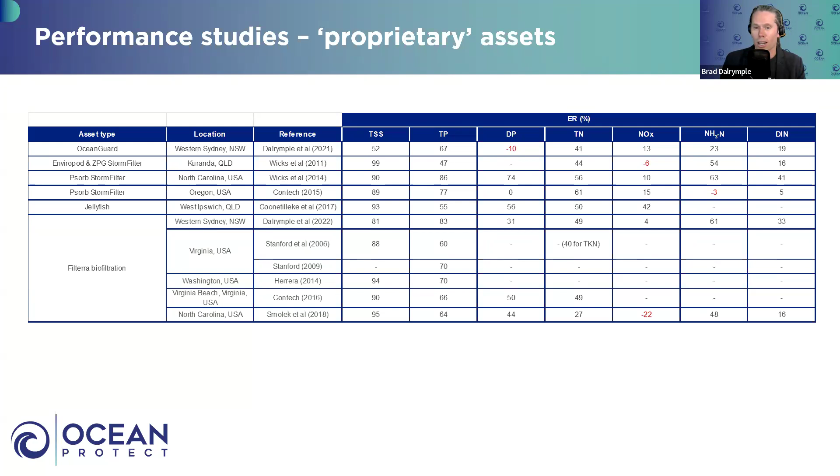If I look at proprietary assets - this is a compilation of published real-world studies of Ocean Protect proprietary assets, including Filterra bioretention. Filterra is always in a weird space - the only proprietary component is the filter media, though sometimes conventional media has proprietary media too, but I've grouped Filterra into this bunch as well. Long story short, the published studies we have available - and that's not just authored by Ocean Protect guys, it's from overseas and others, and other authors within Australia - generally show really good removal rates of TSS, nutrients, etc. Particularly storm filter, jellyfish, Filterra - consistently high rates of nutrient removal, certainly far more consistent than relative to conventional bioretention systems.

So if in doubt, there's more data - the International Stormwater BMP database. I'll charge through this since I talked about it last time. This is publicly available, and it compiles a whole bunch of data from all around the world around the performance of individual assets. In this case, BR is conventional bioretention, HRMF is high rate media filtration, HRBF is high rate biofiltration. So HRBF is like Filterra, HRMF is like storm filter cartridges.

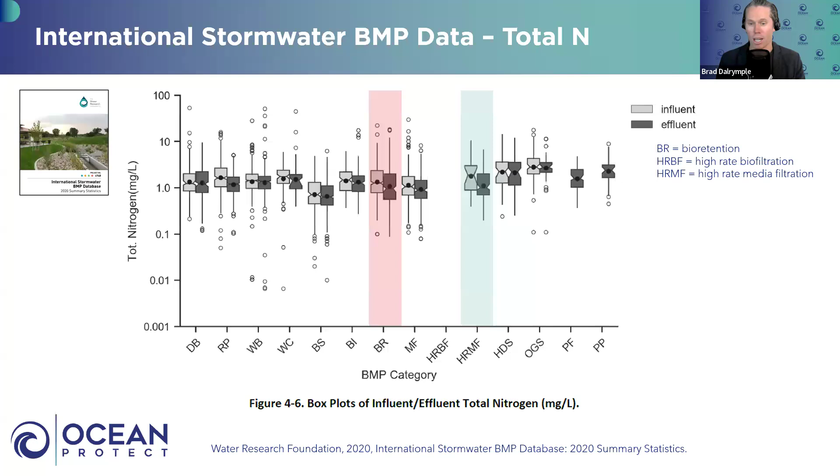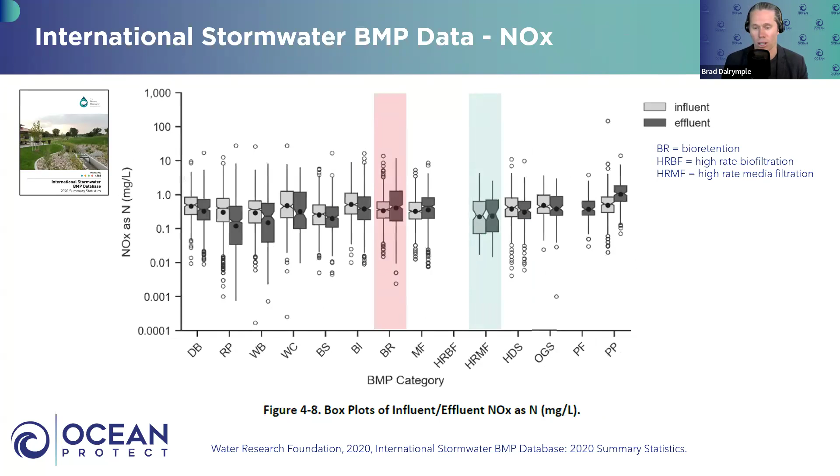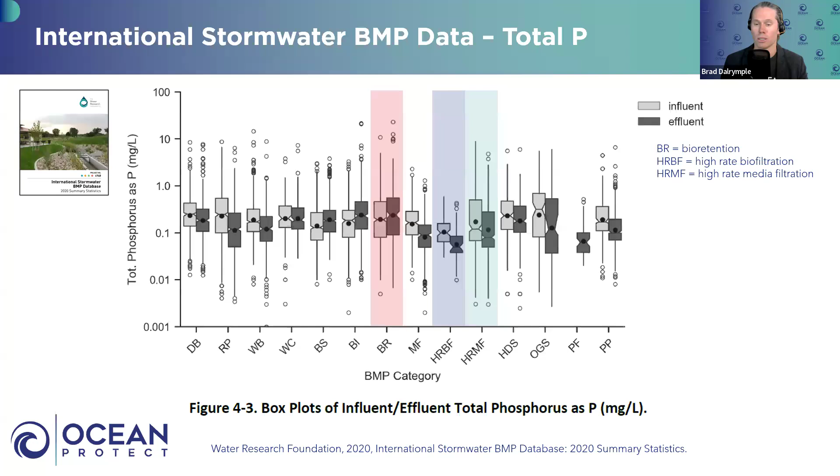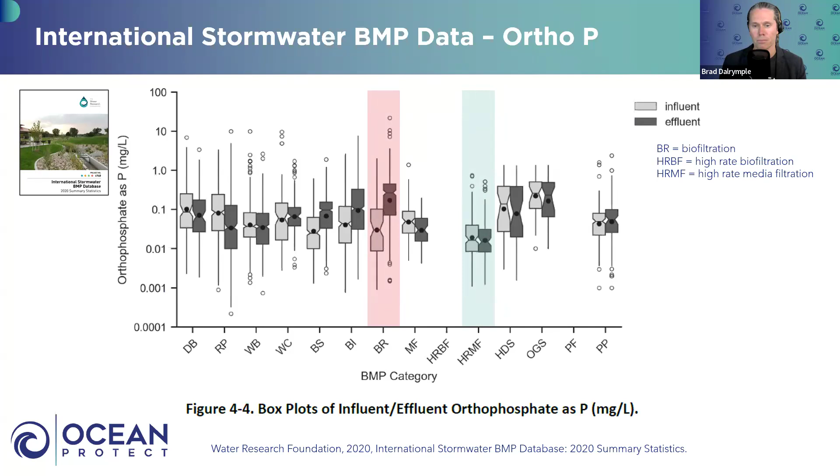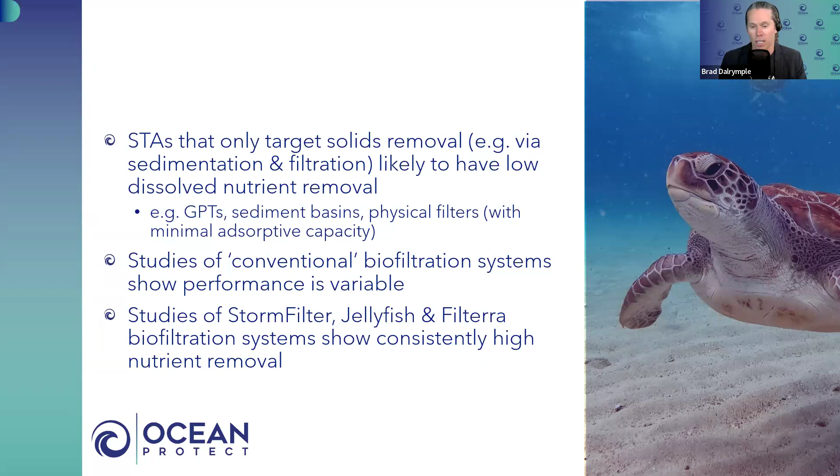So a couple of comments on that: STAs that only target solids removal - like sedimentation, filtration, whether it's a GPT or a gully pit basket - are not likely to have dissolved nutrient removal. If it's just physical treatment, you're not going to get a huge amount in the way of dissolved nutrient removal. But certainly the studies around conventional bioretention systems show the performance is highly variable, whereas the studies of StormFilter, Jellyfish, and Filterra show consistently high nutrient removal. So this claim that bio and wetlands are much better at removing nutrients - the data shows the total opposite. Again, happy to be disagreed with.

So that's our content for today. I know I've charged through it - there's a lot of content there.

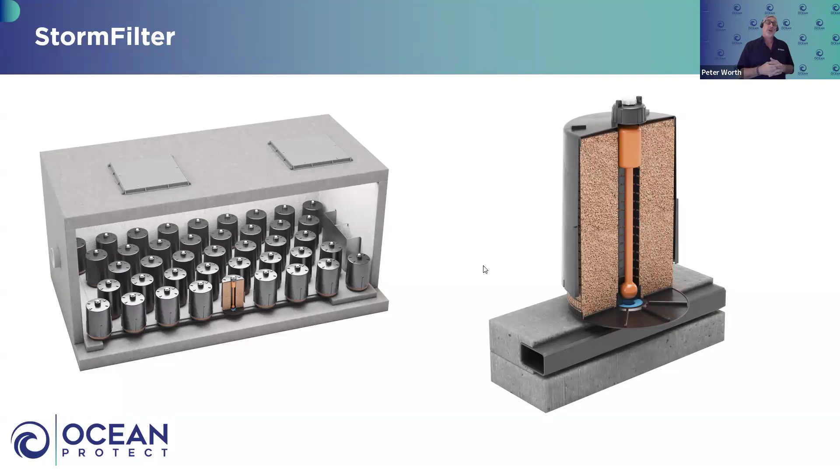Cool. Question from Jack Raymond. He asks, in the replacement of the cartridges, such as StormFilter, does the false floor with the drainage pipes in them need to be replaced? Or do new replacement cartridges connect to the false floor system? With the way the false floor works for the StormFilter cartridges, we have a connector that pokes through the top of the false floor that connects to the underdrain pipework encased in that false floor. There's a half bayonet screw attachment that fixes the cartridges onto that connector. When we replace the cartridges, we unscrew it, take them out, put the new ones in, and lock it back into the underdrain. So no, the false floor should last in perpetuity. The other advantage is if you ever get anything blocking the underdrain pipework, we can always back flush it to the downstream side of the weir wall at the back end of the system to clean out those underdrain pipes.

Just to clarify, when Peter's talking about the false floor, he's talking about this thing. There's underdrainage, an underdrainage manifold, in that false floor, so that doesn't need to be replaced. No. What we're pulling out or replacing is the cartridge here, and the media inside. Everything else is reused. The filter media is obviously contaminated, so we can't reuse that, and we use new filter media, but every other component is actually refurbished and reused, and goes to another project. Great question, Jack.

Question from Theo Risley. He asks, can you please provide an estimated timescale for the regular maintenance and also the replacement of the products shown today? It was shown for the jellyfish, but I might have missed it for the other products. Okay, for the OceanGuards, depending on the site, you might need to replace the bags, just the 200 micron bag inside the OceanGuards, maybe every 1 to 3 years, depending if they've got holes or burns or anything like that. In regards to the StormFilter cartridges, we normally estimate that the media needs replacing every 1 to 3 years.